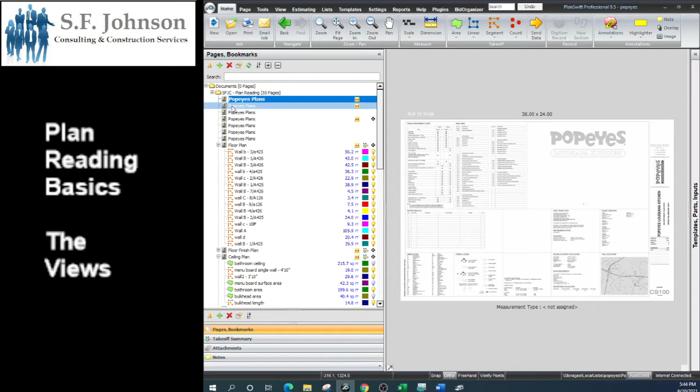So that's what we're here to talk about today in this bonus episode for our basic plan reading class. And now we'll start with the first of the views, which is the plan view. And so when we talk about the plan view, we'll start with the site plan. We'll start with the cover sheet, and we'll start with the MEP site plan somewhere in here.

And why isn't it marked? Oh, because Stacy likes making this life difficult. Let's hope we didn't delete it. Okay, let's go back.

Oh, there we go. All right, so we'll go with the MEP site plan. So plan view. So when we say plan, it's the view from above. It's like if you're hovering over, maybe flying over. It's the most basic of the views. So what we're looking at right here is the MEP site plan in our study set.

MEP is mechanical, electrical, and plumbing, and it's basically showing us the site plan from the plan view of where all of those things are located. So if we pan in, we'll see 8-inch water, 4-inch gas, underground telephone. But the whole point is the view or how we're looking at this sheet. Okay, so the view is again the perspective from which you're looking at the sheet or looking at the information on the sheet. The plan view is the most basic of the views, and I say basic in terms of

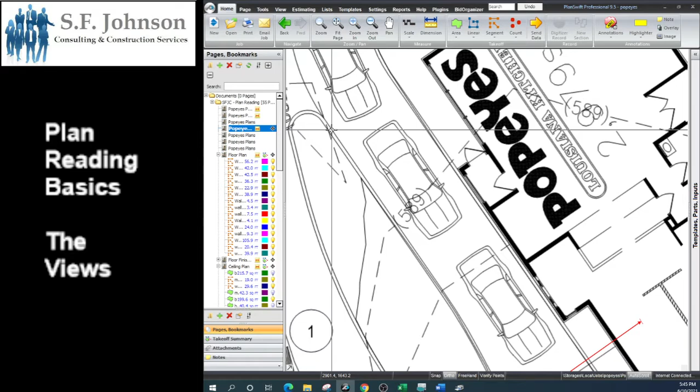if we wanted to construct maybe the curbs. From this view, we can't really do anything other than measure how many linear feet of curb that we're going to construct. It doesn't tell us anything about the thickness, the radius of this angle. It doesn't give us any of that stuff. And so we could do a very poor job if we decided to use this plan view in order to construct anything here. Same thing with, say, for instance, the exterior walls on the Popeyes, right?

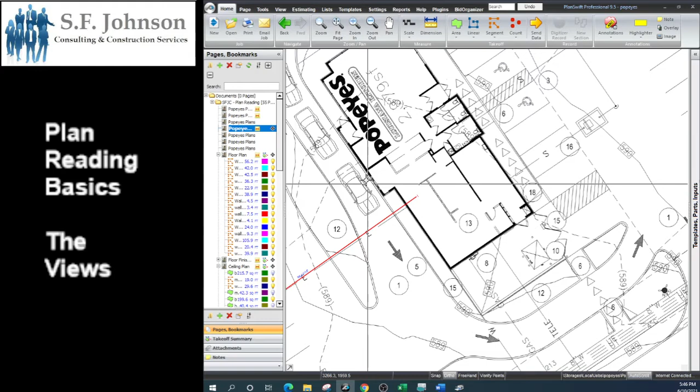We can use this view to measure how many linear feet of exterior wall, but it doesn't give us detail to tell us the thickness of the walls. Is it 2x6, 2x8, whatever. Doesn't give us the height, right, of the wall. We don't know the height of these walls. So again, the plan view is the most basic of the views. And it gives us a good idea of what we're looking at. It's a view from above, but it doesn't give us detail.

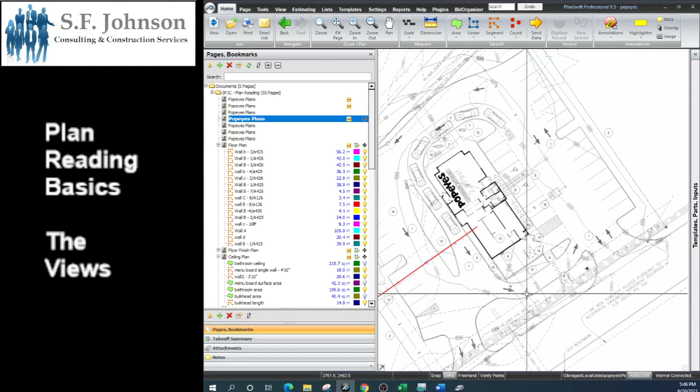Let's go to another plan view, where from this floor plan, right, same view from above as if we've taken the ceiling and the roof off, and now we're looking into the building, same view from above, and same thing. It gives us the information where now we can measure how many linear feet of each of the interior walls are and exterior walls. Okay, they're even marked, so we know that this is wall B.

Okay, and pretty much the plan view, that's all we can do from a plan view, because again, we have the same problem. We don't know the height of the wall. And so in order to see the height of the wall, we go to the second of the views, which is the section view. Okay, so section view gives us the vertical view of any section where it's intersecting.

Okay, so this is a floor plan. And so what the floor plan gives us is how many linear feet. But the section view is going to say, well, I'm going to tell you the height of the wall along this stretch or this section of wall. And the way that you read it is that you go to image or picture number 1 on the page signified at the bottom.

So we go to image number 1 on page A426, and this is a section view. Again, the architect can only give us what? Abbreviations and symbols and lines and numbers to represent what they want us to do. Now I'm the framer and I have to build these walls. And so what I've done as the framer, I've broken down all the walls into appropriate sections. Then I go to the section view and I see the wall construction. All right, so now I'm going to go to 1 over A426 to see the vertical height at this section.

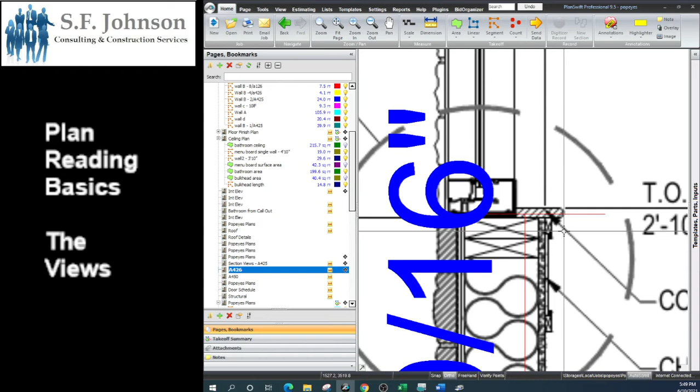Same concept applies if we want to see what is missing. So what the architect is saying, there's some stuff here. You see the sill, you see the chair rail, you see that it's 2x6 wood stud, you see everything on this side, but there are certain things detailed in here that we don't have written here that we need you to get another view. So what do we see here? We know what we don't see here when we go to 5 over A600. So again, we see the sill, we see the chair rail, stone veneer, even the expansion joint right here.

And actually we have two call outs, right? We have 5 over A600 for this encircled here, which is the intersection of the bottom of the window and the top of the wall. Okay, so that's pretty much what the architect is saying. There's something that we need to see, that if you go to 5 over A600, and let's go there now, you can see what you don't see here.

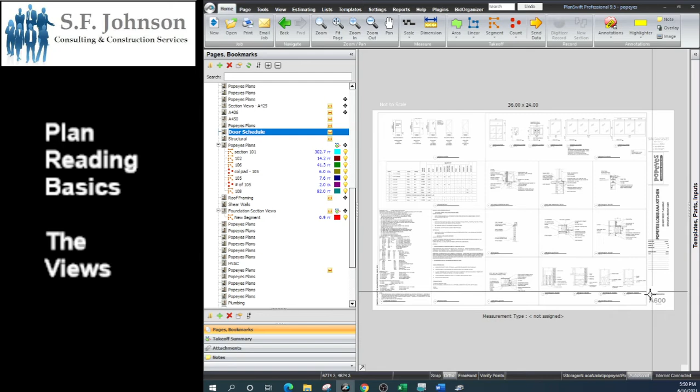5 over A600, here's A600, image number 5. Where is it? I don't have my glasses on, Grandma. All right, here we go.

5, detail at sill. So yeah, continuous caulking wasn't shown in the previous. Continuous flashing on the window wasn't shown in the previous, and all of this, okay? And so now you've gone to the third of the views, the detail view. And you see at the detail view, it gives you everything that you didn't see at the section view, so you can complete the proper construction at that area. Okay, so that's the third of the views.

Now the fourth of the views is kind of different in that we don't really need that view for construction. That view we need for the finish trades. Okay, so now what we're looking at here is the floor finish plan.

But the floor finish plan is giving us all indication by all of the floor tags and telling us what type of material it is by pointing to it. But what this floor finish plan also gives us is these little things that look like section view markers, but they are not. They are elevation markers.

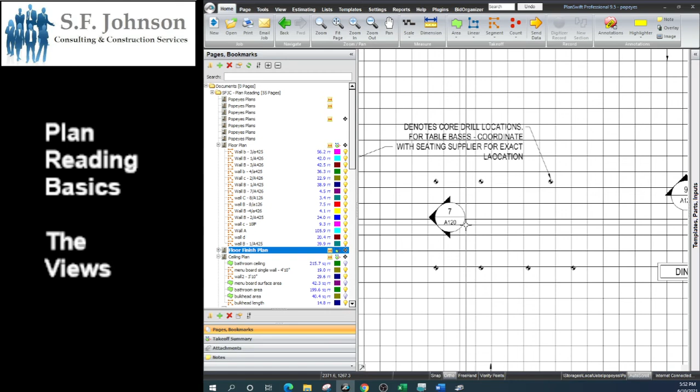And so what it's telling us is that if we go to image number 7 over at page A120, we're going to see all the finishes that are here on this wall. If we go to image 9 over A120, we'll see all the finishes here and all the way around. And here, you always want to see elevation markers.

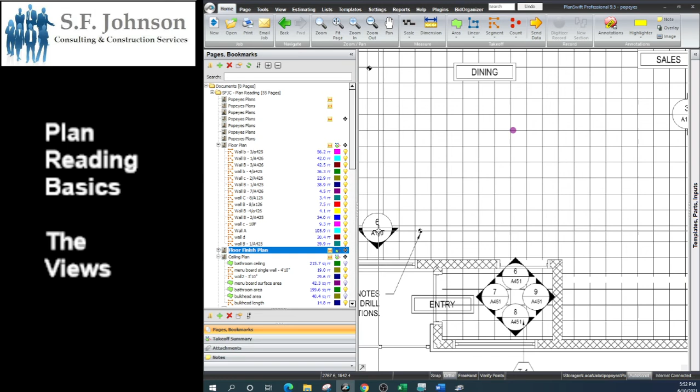So this is an interior. These are interior elevation markers, is what they're called. And they're used to point you to an individual wall, whatever it's pointing to. And if you go to that picture on that page, it's going to show you how the finishes are arranged on the wall. So let's go to the first one, 7 over A120.

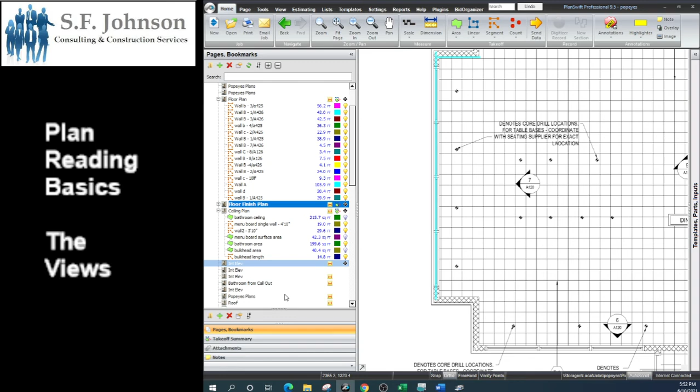Let's see, 7 over A120. This is 126, so we've got to go back up a little, 7. And then image number 7. Okay, so image number 7 is right here, the dining room elevation. Okay, so now it's showing us all our walls are built, right? So showing us where the finishes are going, where P2 is going, where WS/1 is going, where CB1 is going on that wall.

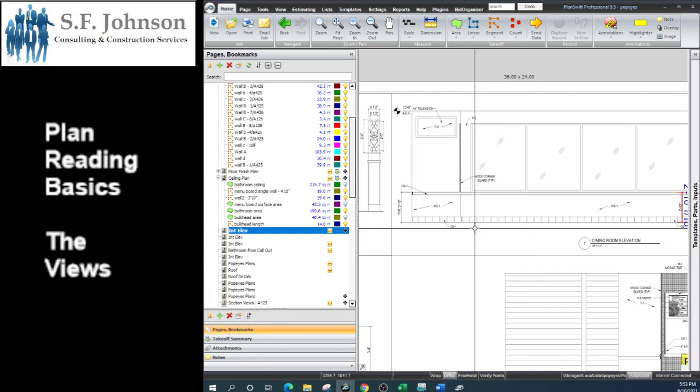So now I'm the finish contractor. I'm the painter. I'm installing some of the finish trim or finish whatever. I can make my measurements using the interior and exterior elevations. You also have the same thing on the exterior.

Okay, so let me show you some exterior elevations, right? Same thing for the outside. So now exterior elevations show you all the finishes on the outside. So now I'm the brick veneer professional. I'm the caulker. I've got to caulk around the windows. I can use this to make all my measurements.

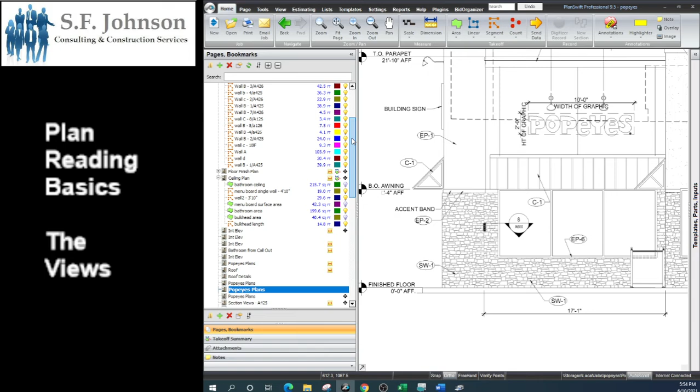Okay, so that completes the 4 views. You have the plan view, the most basic of the views, from above. Right? It's the view from above, most basic of the views. What we see the most is the floor plan. From the floor plan, of course, we're measuring how many linear feet of wall, but we need a height for the wall. So the section view takes us to the height. Okay, so that's the second of the views, which is the section view.

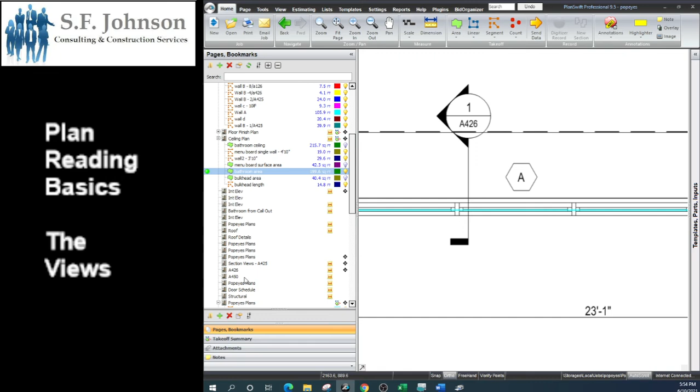Okay, so the section view now gives us the height. We were up here from the floor plan. Section view gives us all of the individual sections. So now we can see how the interior walls are built. Helps us with our wall construction, helps us determine how many square feet of wall. And then when we're in our section view, 9 times out of 10, we're going to go into a detail callout to take us to another view, which is giving us information about what we don't see here to ensure that we complete the proper construction.

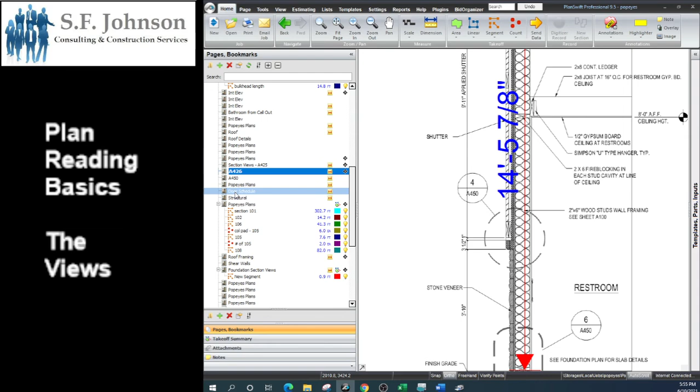And then the last of the views, well, let's go to the detail view. Okay, so the detail view has all the things we didn't see in the circle. Okay, so you're going to always have a sheet of detail views pretty much in every set, right? Because there's always something. We've got to get down to the nitty gritty of the construction.

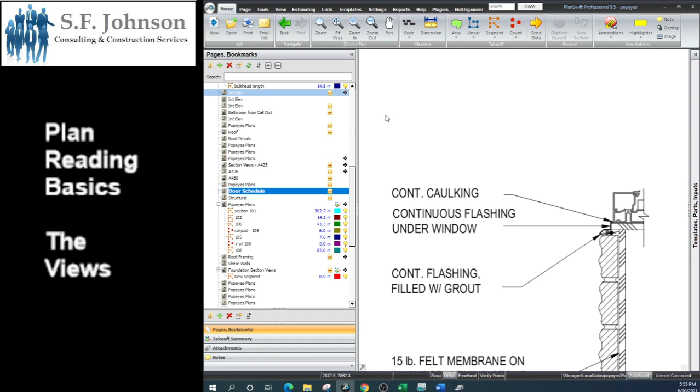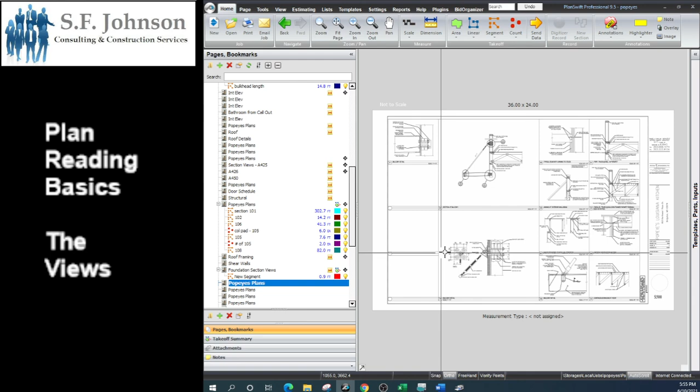All right, and then the last of the views are for the finish trades, interior elevations. So the painter and the finish trim and the this and that, the painter, the tile, the wall base professional knows where all of that goes, and that's at either an interior, inside elevation view, or an exterior elevation view. Let's find it. Oh, of course, that's not it. Here we go. Or an exterior elevation view. Okay, so that completes the 4 views.